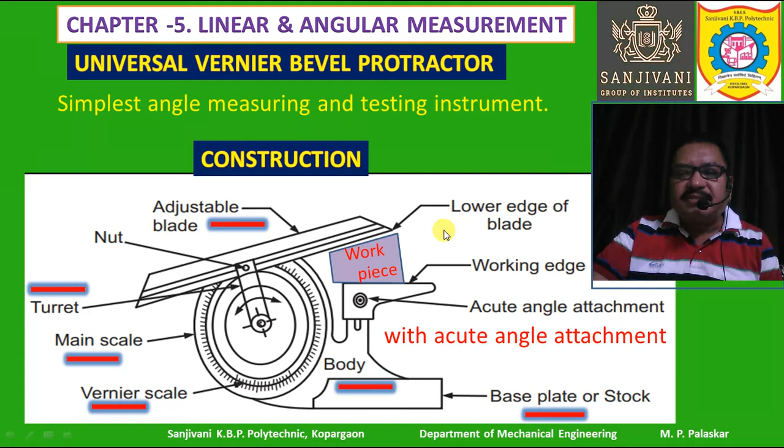Let us revise the construction and the various parts. First of all, the base plate is there. The base plate has a high quality surface finish and high degree of flatness. It is also called the stock. It is placed on the workpiece surface whose angle is to be measured. So the base plate is placed on the surface of the workpiece whose angle is required to be measured.

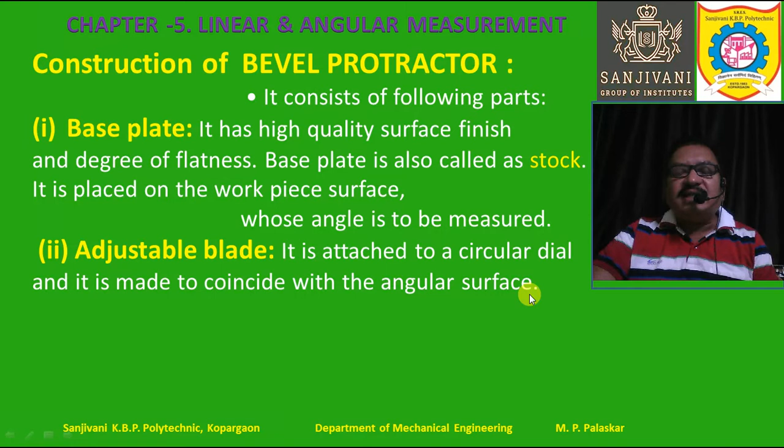We are having the adjustable blade. This adjustable blade is attached to a circular dial or circular disc, and that is made to coincide with the angular surface. The adjustable blade coincides with the surface between which we are interested to measure the angle, and this can be rotated. The adjustable blade can be rotated along the turret to the required angle and can be locked at a suitable position.

This point is very important. We have missed at the beginning that the adjustable blade can also be locked, so the rotation of the adjustable blade can be stopped at any desired position depending upon the angle between the two surfaces. So when the adjustable blade matches with the other surface, then we can lock it and then we can measure the angle.

After locking this particular adjustable blade to the suitable position, then we can take the reading. At that suitable position at which the adjustable blade is locked, the reading of the circular scale which is mounted on the dial can be taken and noted down accurately. So to note down the reading accurately, it is necessary to lock the adjustable blade so that it will not move and the reading will not change.

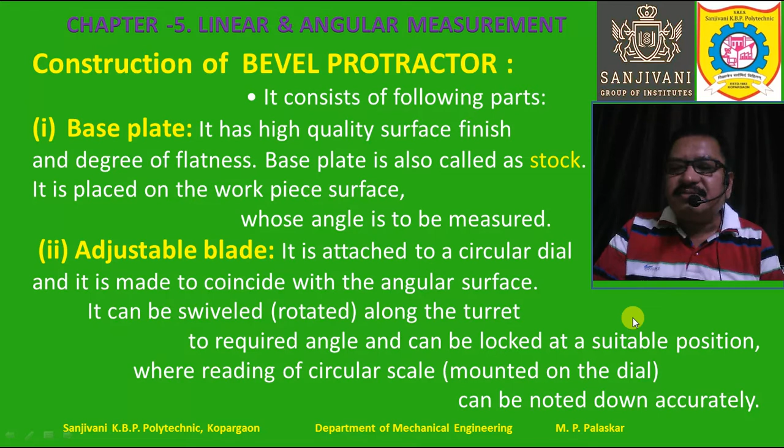Now let's continue the construction of the bevel protractor. The main scale is present.

The main scale is engraved on a disc which can rotate along with the moving adjustable blade, and it rotates with the rotation of the adjustable blade. So the main scale can be rotated depending upon the angle, since the rotation of the main scale is nothing but the angle through which the adjustable blade is rotated.

Next, after the main scale, we also have the vernier scale, but the vernier scale is stationary. It will not rotate along with the main scale. But the vernier scale divisions can coincide or match with the main scale divisions, and since the main scale rotates, the divisions which match with the main scale will change with its rotation.

So the vernier scale is a stationary scale mounted very close to the circular dial. These two scales are very close to each other, so that we can see which mark is coinciding with the other. It is just like the working of vernier calipers.

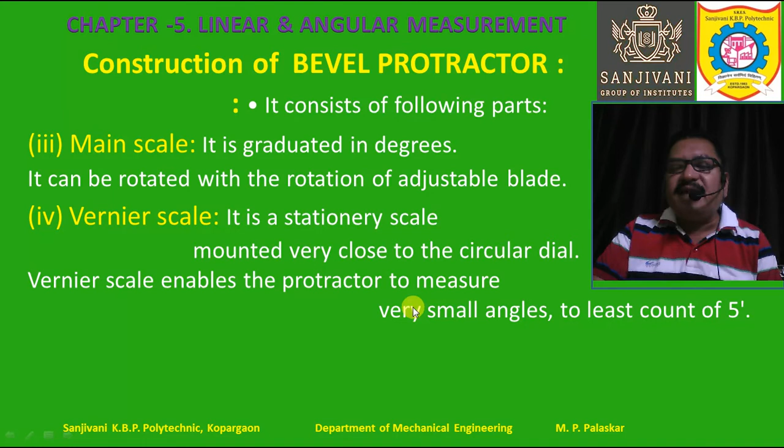1 degree angle is a fairly small measurement, and if we divide this 1 degree into 60 parts, each part is called 1 minute. The least count of most bevel protractors is something like 5 minutes, so we can measure very small angles up to the accuracy or least count of 5 minutes.

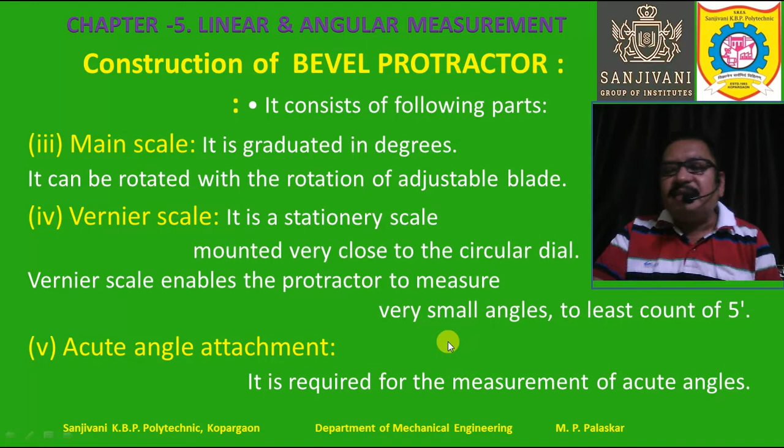Now we have an attachment for the measurement of acute angles, which is necessary for measuring acute angles. The measurement is done in this particular way.

How is measurement done? With the help of the bevel protractor, here the measurement of the acute angle is shown. This is the workpiece or job, placed on the working edge of this particular acute angle attachment.

One surface of the workpiece rests on this edge, and the lower edge of the blade comes in contact, resting on the other surface of the workpiece, so that we can measure the angle theta between this surface and this surface.

These two surfaces are seen as lines or edges because we are observing in a direction perpendicular to, or parallel to, these particular surfaces. Therefore this surface appears as an edge, as a line, and this is the angle theta between these two surfaces.

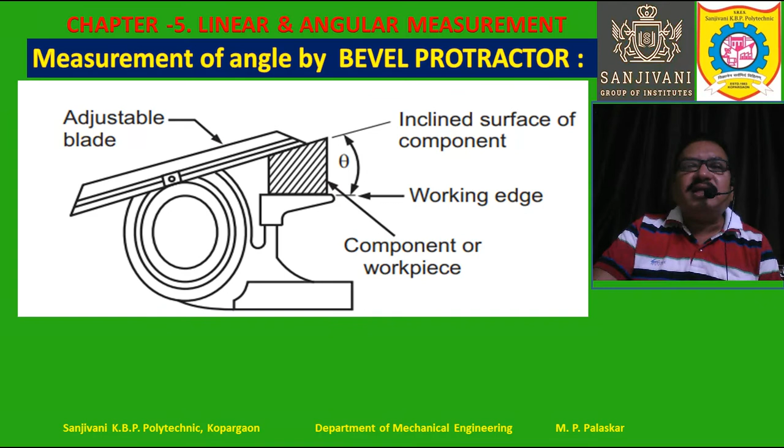We are going to study in detail about the measurement of the angle, how to find the angle and how to take the readings, in the next slides. This is how we use this particular bevel protractor. Let us study the working of this angular measurement further.

Actually we have studied, let us revise.

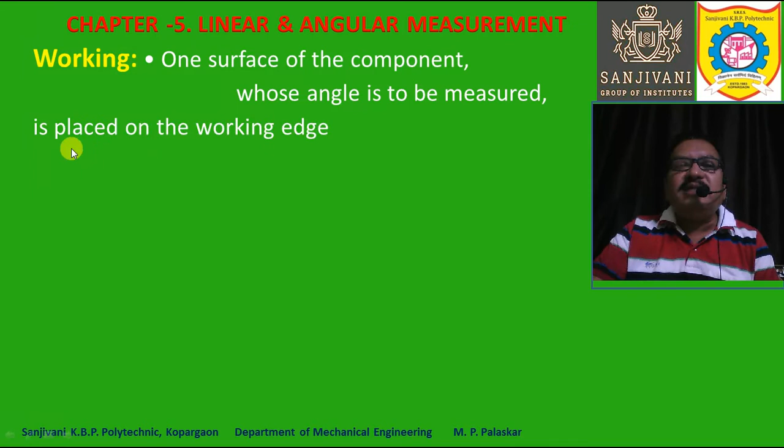One surface of the component whose angle is to be measured is placed on the working edge of the acute angle attachment, and the adjustable blade is moved such that its lower edge coincides with the angular surface, that inclined surface of the component between which the angle is required to be measured.

Now the adjustable blade is locked into position to get accurate measurement, so that there should be no movement of the adjustable blade and no change in the reading. We are locking the position of the adjustable blade so that we can get the accurate value of the angle measured.

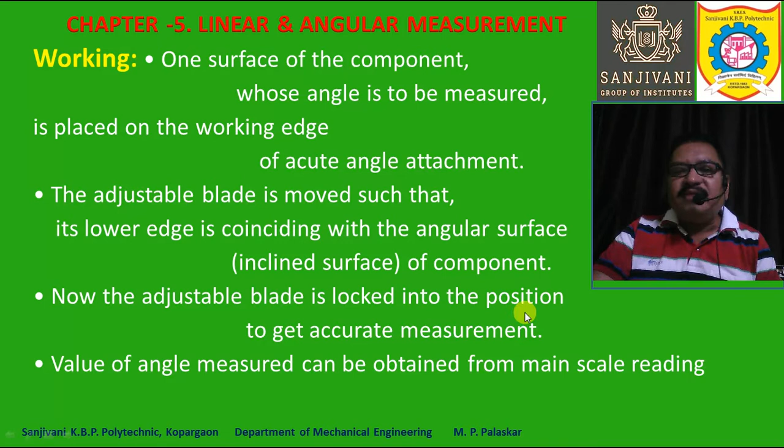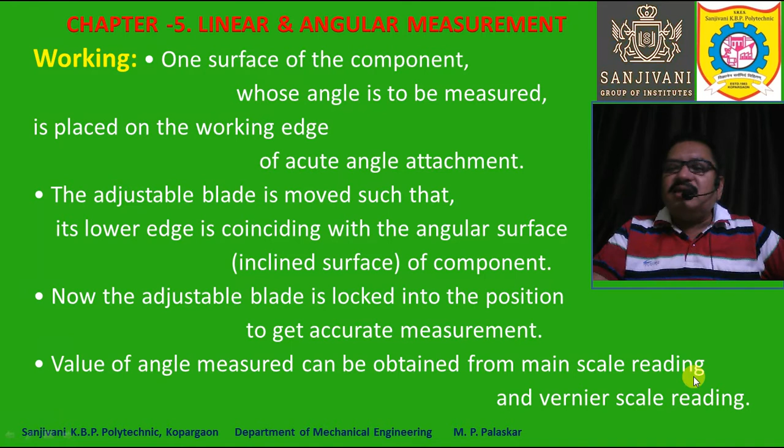The value of angle measured can be obtained from the main scale reading and vernier scale reading. So we have to take both readings, main scale and vernier scale, and use the appropriate given formula to find the value of the angle. This procedure is similar to the readings of the vernier calipers.

So here we can see the scales. This is nothing but the vernier scale, and this is the main scale. The main scale partly is shown. This is the 0 of the main scale, and to the left this angle is marked, degrees are marked.

So 1 degree, 2 degree, up to 10 degrees, 20 degrees. On the right side also 1, 2, 3, 4, up to 10 degrees, 20 degrees. On the left side the markings go up to 180, on the right side also up to 180 markings, so that each mark shows 1 degree angle. So 180 plus 180 totals 360 degrees that can be shown. So the least count of the main scale is 1 degree.

Now this is the vernier scale, and this is the 0 mark of the vernier scale. You can see that from 0 to 60, because 1 degree means 60 minutes, so 0 to 60 minutes on the left side, 0 to 60 minutes on the right side.

Here you can see that between 0 to 30, how many markings are there? 1, 2, 3, 4, 5, 6. Six markings are there, so it means each mark is of 5 minutes, because 30 divided by 6 is 5.

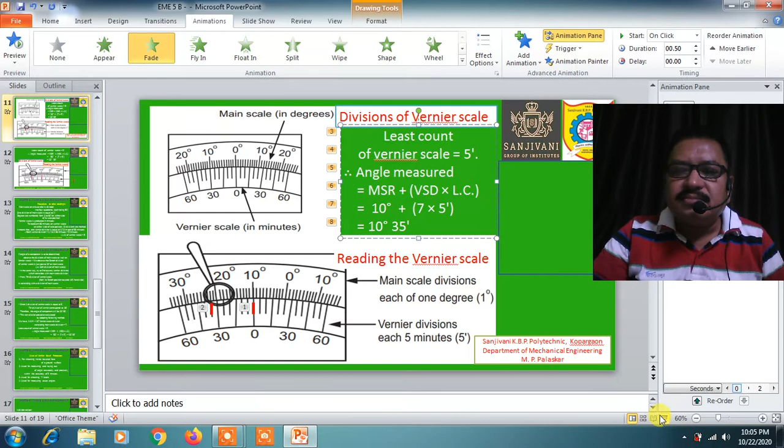So I will just correct this. This is not 50, it is actually 10 degrees. So this correction is done, and in this way we have measured the angle.

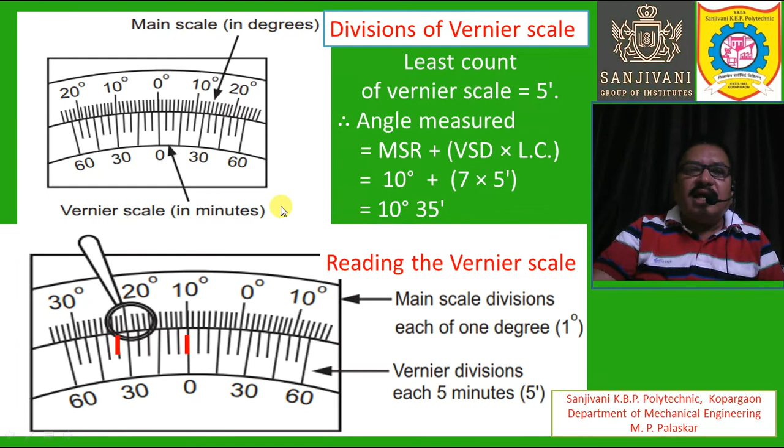Now here also once again we can have the enlarged view, and you can see here these are the vernier scale readings: 0, 5, 10, 15, 20, 25, 30 minutes. These are the minutes. And this is the degrees angle, so this is 0, then 1 degree, 2 degree, then 10 degrees, 20 degrees, like that.

So here you can just try to see the readings. The 0 coincides with 10 degrees, so main scale reading is 10, and the vernier scale reading, as we have seen, is 7. From 0 we just count the vernier markings: 1, 2, 3, 4, 5, 6, 7. So the vernier scale reading is 7, and this coincides exactly here.

So the least count is 5 minutes. Angle measured is equal to main scale reading plus vernier scale reading into least count. And again this correction you have to make - this is not 50, this is 10 degrees.

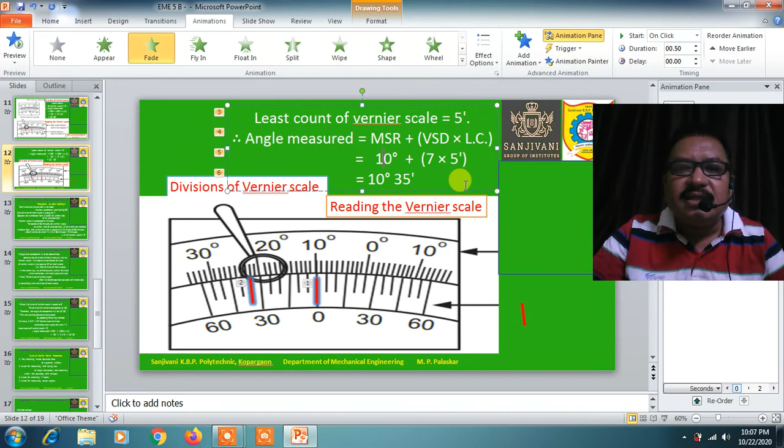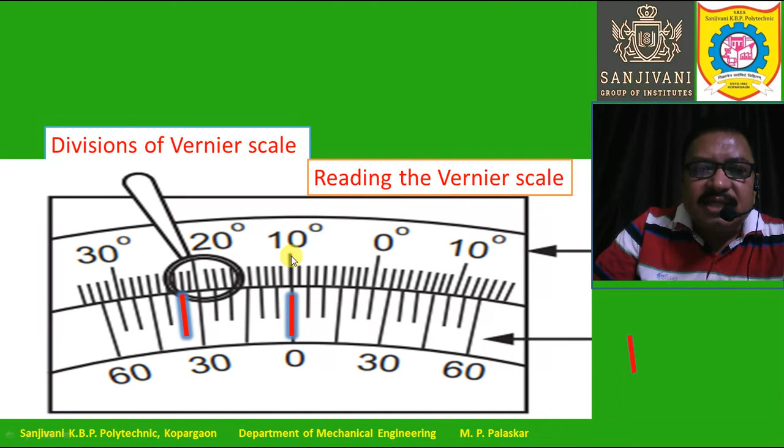So this is the 0 mark for the vernier scale and the 10 degrees mark of the main scale. So main scale reading is 10 degrees, and this vernier scale reading is 7, because this 7th mark coincides here like this.

The least count is 5 minutes. Angle measured is equal to main scale reading plus vernier scale reading into least count. Main scale reading is 10 degrees, vernier scale reading is 7 divisions - I am not saying 7 minutes, it is 7 divisions - multiplied by least count of 5 minutes.

So actually this is 7 fives are 35. These are 35 minutes: 5, 10, 15, 20, 25, 30 and 35, like this. So that comes to 10 degrees 35 minutes. That is the measured angle. So in this way the angle is measured and the readings are taken with the help of the bevel protractor.

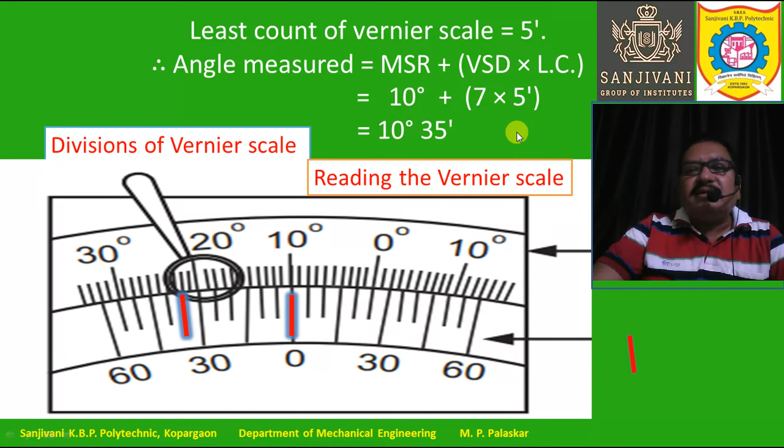The universal vernier bevel protractor can be used in this particular way. Okay, so let us revise the procedure to take reading.

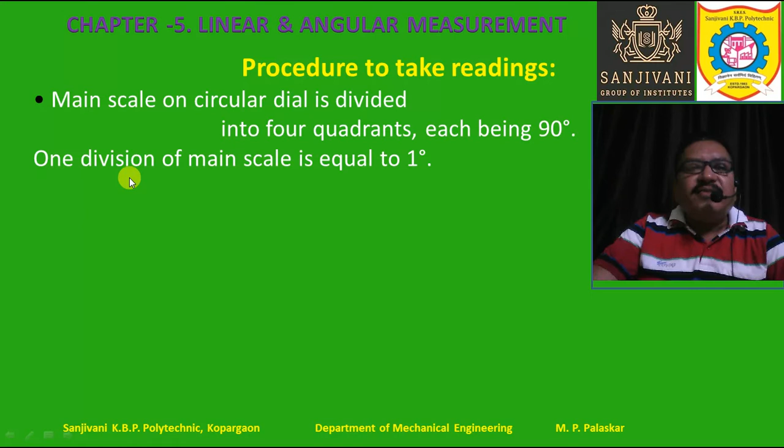Main scale on circular dial is divided into 4 quadrants, each being 90 degrees. One division of main scale is equal to 1 degree. Degrees are numbered from 0 to 90 on either side of its 0 position. So each quadrant has markings of 0 to 90, that is 90 divisions on each quadrant, and each division is equal to 1 degree.

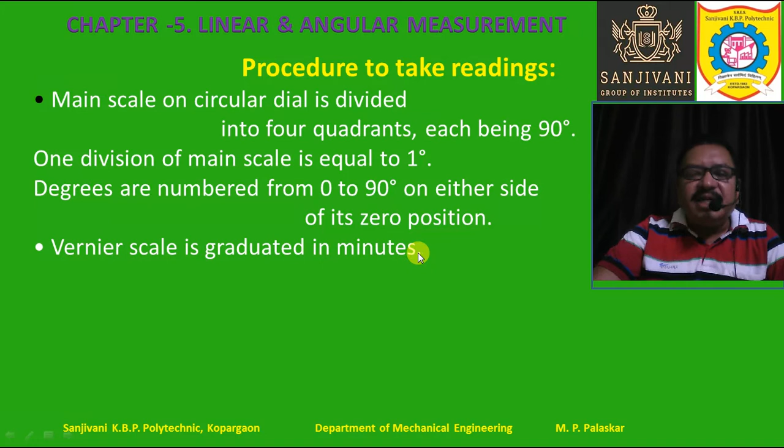Vernier scale is graduated in minutes, each division equal to 5 minutes. To represent 60 minutes on the vernier scale, on either side of the 0 position, 12 divisions are marked. So we have 12 divisions on the left side as well as on the right side of the 0 position on the vernier scale, and these 12 divisions indicate 60 minutes.

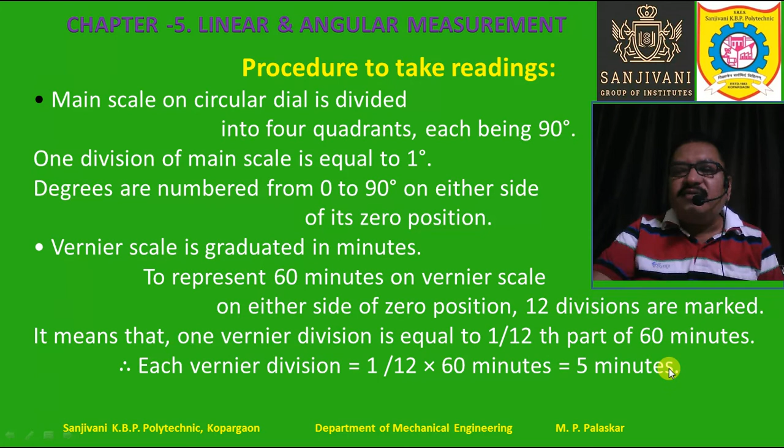So that means 1 vernier division is equal to 1 upon 12th part of 60 minutes, that is 60 upon 12, which is 5 minutes. So each vernier division is 5 minutes, and 5 minutes is the least count of the vernier scale.

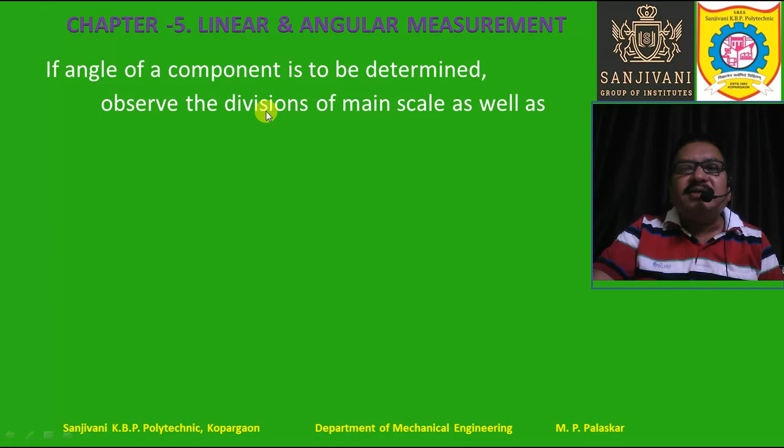If the angle of a component is to be determined, observe the divisions of main scale as well as vernier scale. We observe that the 0 division of vernier scale is just past 10 degrees on the main scale, so the main scale reading is 10 degrees.

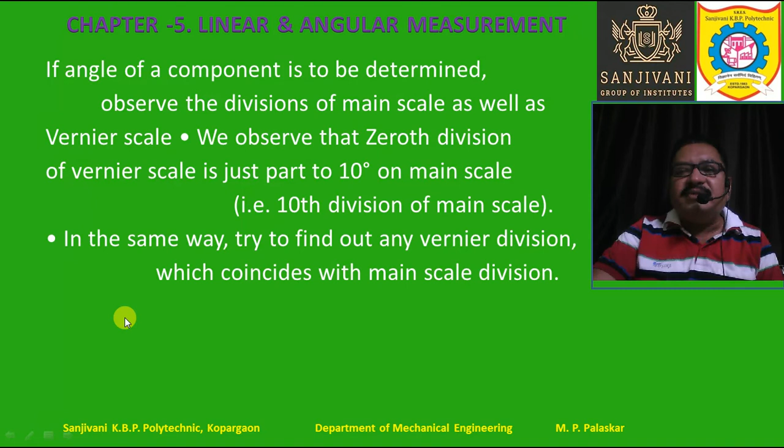In the same way, try to find out which vernier division coincides with the main scale division. We have seen that the 7th division coincides with the main scale division. So the 7th division of vernier scale from its 0 position towards the left hand side is coinciding with a division of the main scale.

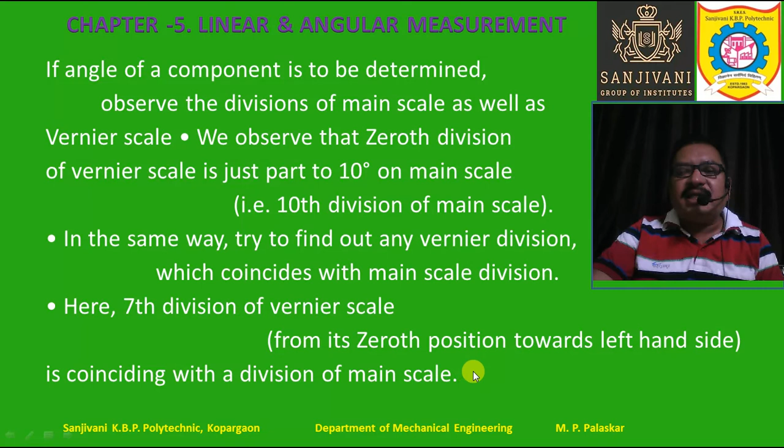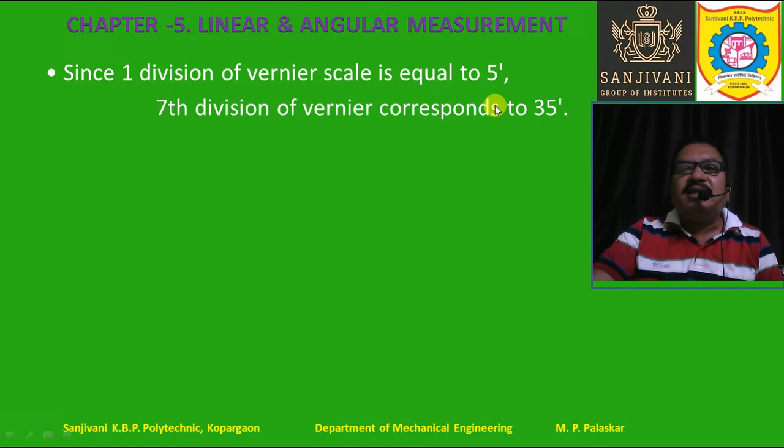Since 1 division of vernier scale is equal to 5 minutes, the 7th division of vernier corresponds to 35 minutes, 7 times 5 is 35. Therefore the angle of the component will be 10 degrees 35 minutes. So it is very clear that the angle measured is 10 degrees 35 minutes.

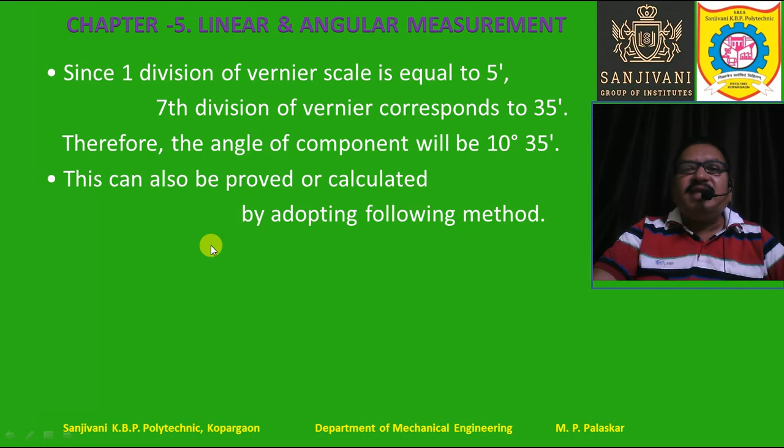Or we can use the formula we have already used. Main scale reading is 10 degrees. Coinciding main scale division is equal to 7, so the vernier scale reading is 7. The least count of vernier scale is 5 minutes. So angle measured is equal to main scale reading plus vernier scale reading into least count.

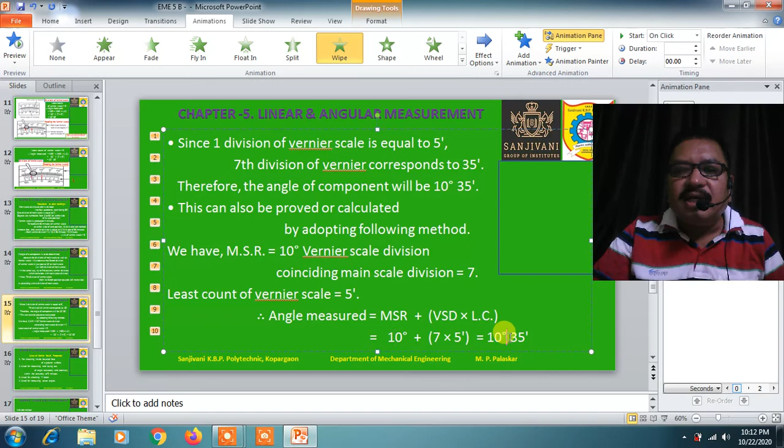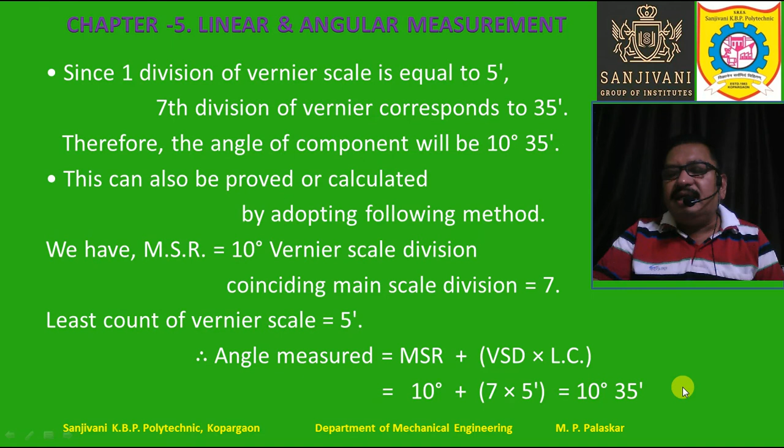So again here, this correction - this is not 50, this is 10. So main scale reading is 10, plus vernier scale reading is 7, and least count is 5 minutes. So ultimately we get the reading as 10 degrees 35 minutes, that is the angle which we have measured.

So let us study the various uses of the bevel protractor. It is used for checking the inside beveled face of a ground surface - a surface which is properly ground, properly finished, and which is inside beveled. The inside beveled surface angle can be checked by using the vernier bevel protractor.

It is also used for measuring and laying out an angle accurately and precisely. We can not only measure but also lay out a particular angle, so that we can mark that angle on the workpiece accurately and precisely, within the accuracy of 5 minutes, which is the accuracy we have already seen.

It is used for checking V blocks, so whether the V block angle is perfect or not, and whether it is the same, not changing along the length of the V - that can also be checked using the vernier bevel protractor. It is also used for measuring acute angles. So these are the uses of the vernier bevel protractor.